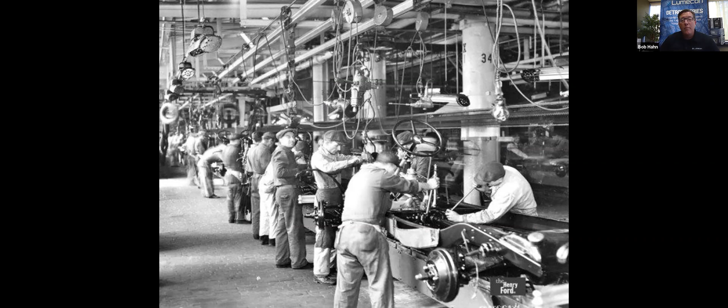100 years ago, Detroit moved the world and provided automotive innovation and defined an industry. Now, more than a century later, Detroit still delivers on that quest: build quality, precision, and do it in America. Not only does Detroit lead the world in automotive innovation, but it also serves as a caretaker to the very people that live in and around the city, providing work and sustainable communities to raise our families in.

Representing the city from which we build it, the Detroit series line offers bold, precise design and execution focused on exact tolerances, clean lines, and elite engineering. These are all cast in the United States and boast a 10-year all parts warranty. Let's face it, we're an engineering team first, then we put on a manufacturing hard hat. The inspiration for Detroit is visible throughout the whole line. The Detroit series sets Lumecon apart from the rest of the outdoor lighting industry.

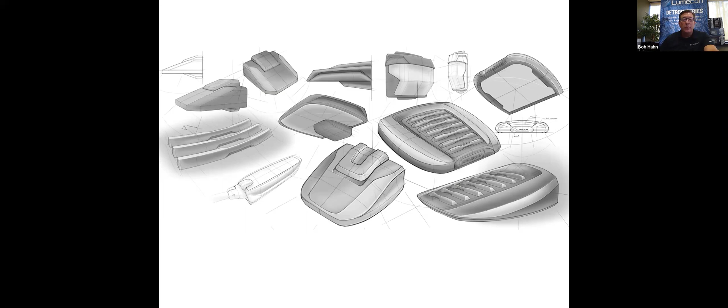We brought our product forth from concept to production line. This slide shows you the conceptual image that we used to shape the Lumecon Detroit series fleet. Then these CAD drawings show the level and amount of detail that we put into the design of the fixture.

So now what? Let's talk about how we built it. From the beginning of the design process, we brought precision and focus to every step of the way. We keep this passion at a fever pitch throughout the build and construction process. The build process begins with bringing together the brightest of suppliers, including tier 1 and tier 2 suppliers to the automotive industry. Our goal: to build the most rugged, precise, and functional LED light on the market.

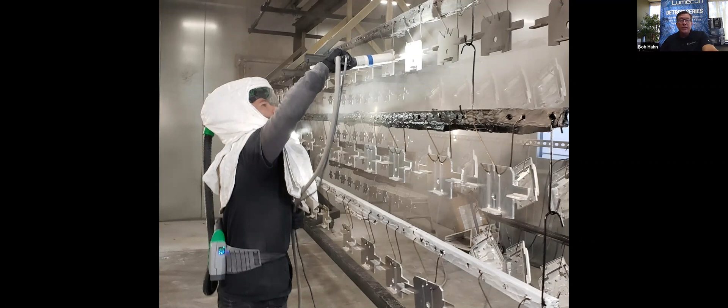The Lumecon Detroit series products are coated using PPG Envirocron Extreme Protection Edge powder coating, an advanced powder coating technology that delivers exceptional corrosion protection. The unique patented polyester paint product provides maximum protection at locations where all other paints begin to fail, at the edges, providing 20 plus microns of paint at all sharp edges, where most other paints are only 2 microns or even less.

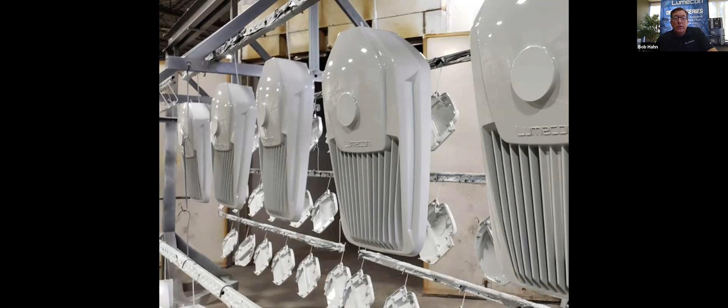The base aluminum material is prepared using an environmentally friendly non-chrome 2-step surface cleaning and passivation process. This results in a more durable conversion layer than traditional chromate conversion coatings and allows maximum adhesion of the powder coating to the aluminum substrate. This unique coating technology provides a finish with unmatched durability and superior gloss retention for years of service in harsh environmental conditions.

Let's talk about Lumecon's enhanced thermal design. Lumecon's ETD system engines are thermally bonded to provide maximum thermal dissipation to the exterior of the fixture to ensure long life. We start off with the LED and its inner diode, then extract the heat out of the rear of the LED, take it through the metal core board directly to the fixture, and then off into the ambient environment.

To protect the light engine panel from moisture and corrosion, the complete face of the LED light engine panel is uniformly coated with a UV stabilized acrylic polymer resin that meets MIL and ASTM dielectric standards and UL and IPC standards for flammability, moisture resistance, and thermal shock. This technology boasts the most thermally efficient light engine design in the LED lighting industry.

If we take a look inside the fixture, we only use tier 1 componentry, meaning our LEDs come from Nichia, Samsung, Osram, and sometimes Cree. Our drivers are mainly Philips or Meanwell. They're programmable drivers that can be field adjusted.

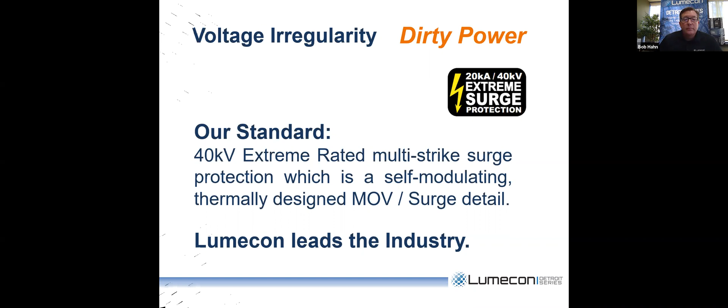So now that we've designed, constructed, and built, now we need to test. With all the care that's taken in design and build, we have the confidence to run the Lumecon Detroit Series product through the most rigorous testing in the industry.

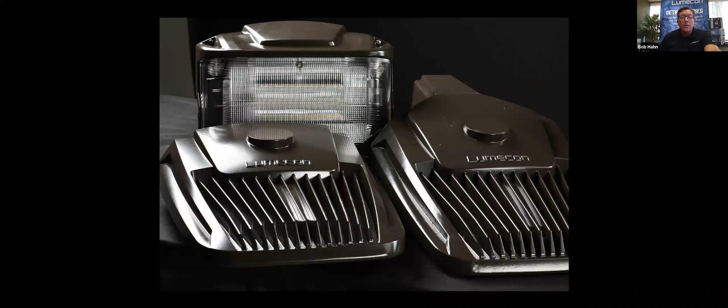First, we start off with 3G vibration testing to make sure it withstands the everyday normal vibration out in the marketplace, including bridges, tunnels, heavy semi-truck traffic. Believe it or not, vibration is another big reason for failures of product in the marketplace.

We salt spray it for 600 hours. We run it through LM79, which includes in situ heat testing at the case of the power supply and the LED array, to make sure it will be able to warranty it for 10 years. Of course, we run it through UL 1598, and then we upload all of this data to DLC, Design Lights Consortium.

Today, we're going to get started talking about the product with the Lumecon wall pack offering, the Detroit Series forward throw and forward throw mini series.

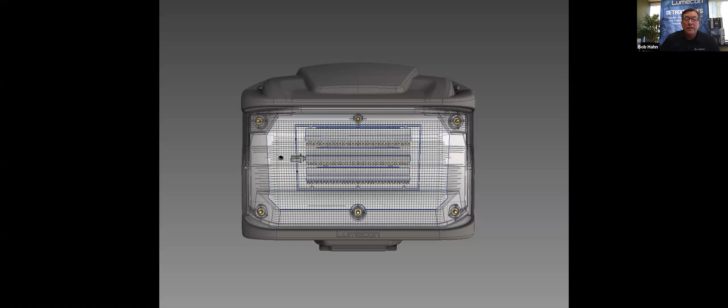Lumecon's forward throw, the larger product, has a large footprint to conceal where other lights have left behind during conversion. From the profile here, you'll see that we've paid close attention to the visual aesthetics of the forward throw housing to enhance its appearance on any building or surface it's mounted to. You'll also see the coin plug knockouts on the sides for surface mount applications.

Now, let's break this out. The lensing here is injection molded in Charlevoix, Michigan.

We've developed precise prismatic lensing that comes with a 20-year warranty against yellowing. Acrylic does not break down unless it reaches 80 degrees Celsius, and with our ETD system keeping the LEDs cool and the rest of the fixture cool, we will not get it anywhere near that temperature. So our ALP Lexalite gives us a 20-year warranty against yellowing.

We've also installed brass inserts to prevent cracking, not only in the installation process, but over years of freeze and thaw cycles out in the actual environment. Here you see our LZAC reflector system to enhance the light pattern, throw, and also achieve DLC rating.

Most excitingly, we have a max compression hot poured gasket that allows infinite compressions, creating a precise seal. The gasket is poured locally here by a tier 2 automotive supplier, Ramp. The gasketing detail we choose ensures that if there is a need to open the fixture, the gasket will hold for your product's life and perform as intended in any climate.

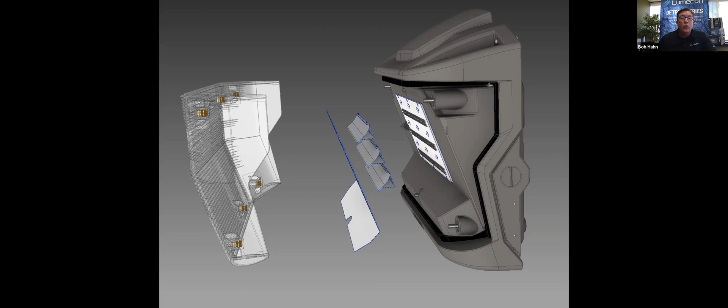The LED board here, featuring Nichia 757 LEDs, are the most efficient LEDs in the industry. The diodes are robotically placed in Troy, Michigan or Clinton, Michigan, directly onto our metal core boards. We offer 80 and 90 CRI options and color temps that range from 2200K up to 5000K. We're going to talk more about that in the future.

This image depicts the back of the housing to illustrate how much space we designed for multiple options. Standard is, again, the 40kV surge suppression and a programmable driver, and then again you see here another max compression hot poured gasket. And then of course you can fit in aux sensing, battery backup, wireless controls, and maybe even some things we haven't thought of yet.

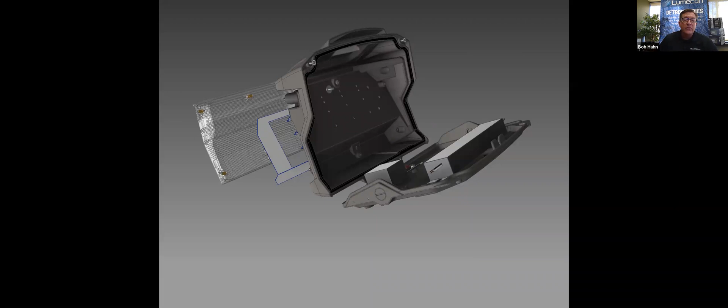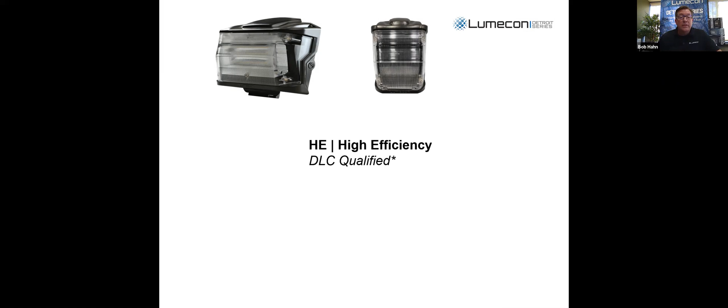Like any car manufacturer, there are always different classes of cars and trucks, and in that likeness, the Lumecon Detroit Series forward throw series offers 3 definitive classifications for your specification lighting project. There's the HE, which is the DLC listed option. There's the HE2, which is the best lumen per dollar option. And the regular, which is the best overall dollar per lumen value.

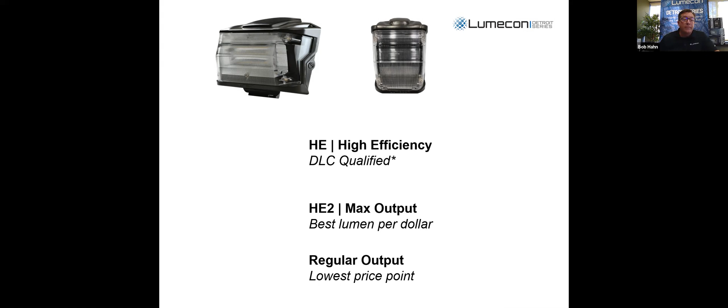So recapping, the body is forged die-cast aluminum, which occurs in Muskegon, Michigan. The housing is a single cast design featuring continuous pour and gasketing for a wet rated assembly concealed in a clean, streamlined wall pack enclosure. The lensing is prismatic, boasting an industry-leading best 20-year non-yellowing warranty that can only be achieved through the injection molding process performed by ALP Lexalite, located in Charlevoix, Michigan. The lensing has been custom designed specifically and exclusively for the Lumecon Detroit Series wall pack fleet.

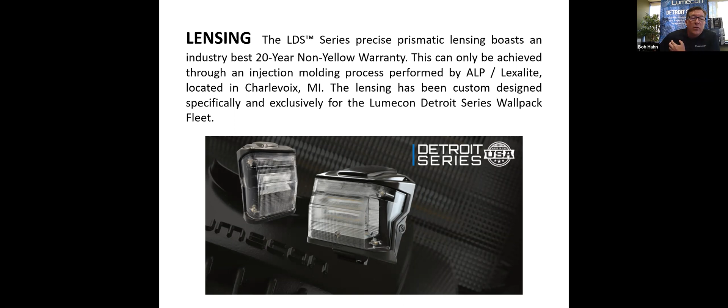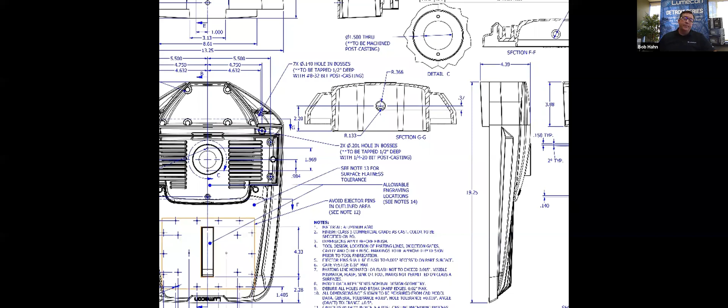We want to introduce our flagship products now: the Lumecon Detroit Series area light and floodlight. The LDS area and floodlight solutions stand ahead of the class in outdoor lighting. Like our wall pack lineup, we've covered every detail during the design phase of this product. So introducing the Lumecon Detroit Series large area light, large floodlight, small area light, small floodlight, and full cutoff wall pack.

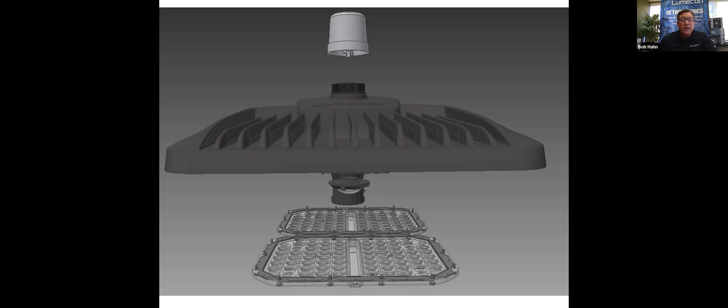The Lumecon area light floodlight was designed as a unibody construction, a one-piece design, to provide optimal thermal path, sharp aesthetics, and unmatched rigidity. This drawing depicts our large area light featuring two light engines with a removable belly pan. As you can see, there's plenty of room for aux sensors, battery backups, programmable drivers, split circuit design, and again, a max compression hot poured gasket for the ultimate seal.

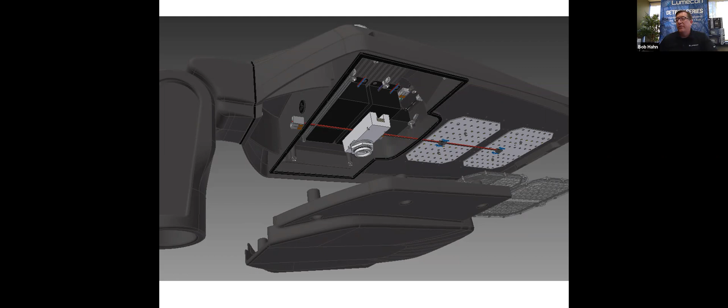Once the belly pan is installed, all the components remain internal, with the exception of the twist lock photocell, aux sensor exterior lens, and wireless controls.

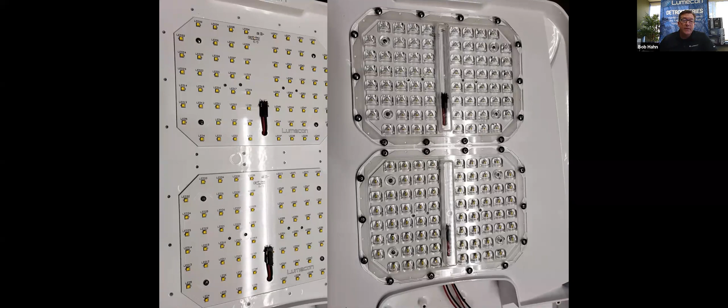On the left here, the Michigan-made metal core board with LEDs placed robotically in Troy or Clinton, Michigan. The optics are placed and sealed on the light engines to create preferred lighting patterns, and that's all done here in Farmington Hills.

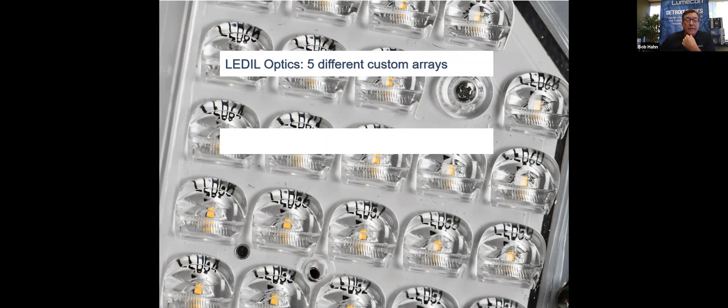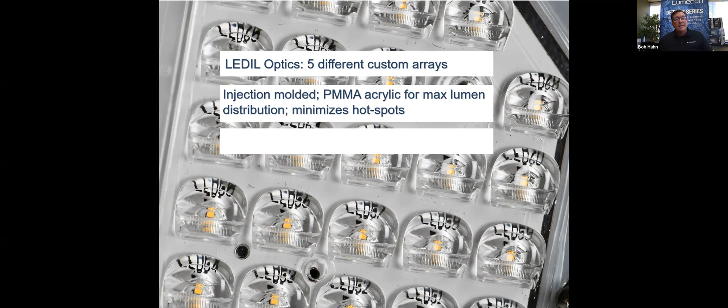Let's talk about the lensing a little bit more. There's 5 custom optical arrays specifically engineered for the Detroit Series by LEDIL in Finland, the world's premier optical engineering and design company. The lenses are injection molded with a premium optical grade PMMA acrylic that provides maximum lumen distribution while minimizing hotspots. They provide 21% better distribution, 29% better uniformity than the leading competitive products at similar wattage levels.

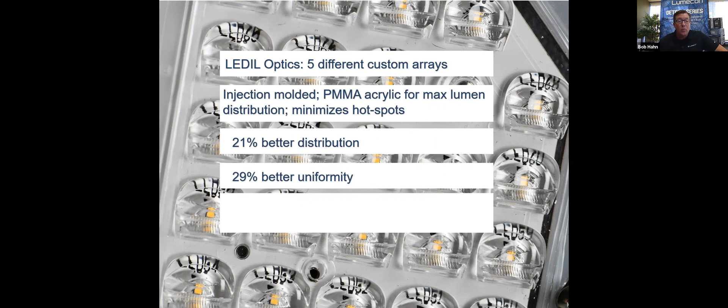The optics are sealed by custom UV stable silicone gaskets that will never harden or lose compression, permanently ensuring no water will penetrate the lens. The entire optical system is thermally engineered to remain below the temperature threshold at which the acrylic will start to yellow, so the arrays will stay optically clear for the lifetime of the product.

Going over the wattages, lumen outputs, and efficacy of the Detroit series large area light: we start with 165 watts creating 26,500 lumens at 160 lumens per watt, and we end up at 330 watts, 47,000 lumens at 143 lumens per watt.

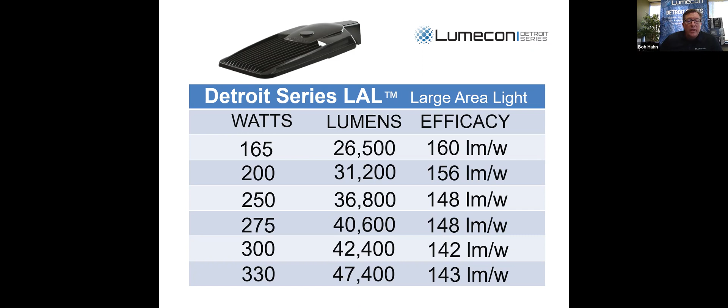Obviously, a replacement for 1,000 watt HPS and/or metal halide all day long.

With the Detroit series small area light, we have a 30 watt version at 4,600 lumens, 154 lumens per watt, all the way up to 160 watts at 23,000 lumens at 143 lumens per watt. In my book, this is a 400 watt replacement all day long, no matter what the current technology.

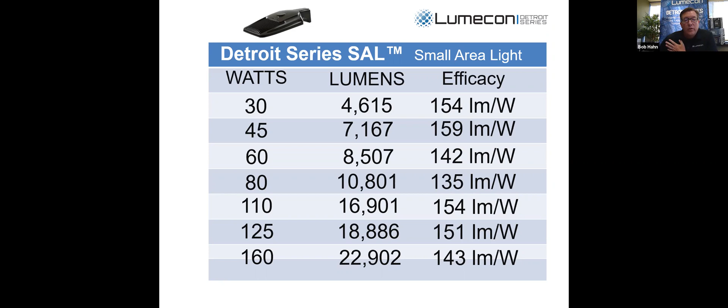So now let's jump to environmental. Many designers are very conscientious of the environment when it comes to lighting. The following describes just some of the options and certifications that Lumecon offers to help complete an environmentally responsible lighting project.

Color matters. At Lumecon, we know that the color of the light is critical. Higher Kelvin temperature LEDs contain large amounts of blue light in its spectrum. Because blue light brightens the night sky more than any other color of light, it's essential to minimize the amount of light emitted. Exposure to that blue light at night has shown to impact human health and endanger wildlife. So the International Dark Sky Association recommends using lighting that has a color temperature of no more than 3,000 Kelvin.

The entire Detroit series lineup has 3,000 Kelvin, 2,700 Kelvin, and 2,200 Kelvin temperature LED arrays available. The Detroit series area lights and full cutoff wall pack are International Dark Sky approved.

Modern society requires outdoor lighting for a variety of needs, including safety and commerce. The International Dark Sky Association and Lumecon advocate the judicious use of required lighting. To minimize the harmful effects of light pollution, lighting should only be used when it's needed, only light the area that needs it, be no brighter than necessary, minimize the blue light emission, and be fully shielded pointing downwards.

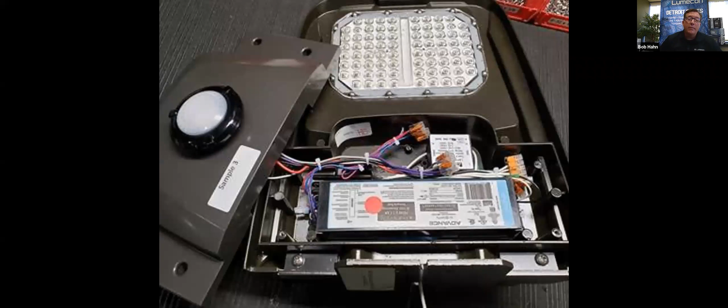So let's talk about field adaptable for a second. Sometimes you order a product in 480 volt and it really turns out to be 120 or 277. Well, not all's lost - you can actually remove the driver. There's plenty of room inside the belly pan, and replace it with the correct driver. If maybe the driver is the wrong wattage for your application, then you can actually reprogram it in the field.

There's also the ability to add aux sensors and photocells, and even change light patterns from a type 2 to a type 3 distribution in case the wrong call was made. We engineered this to be field adaptable, so you're not stuck if the wrong product or wrong options were ordered.

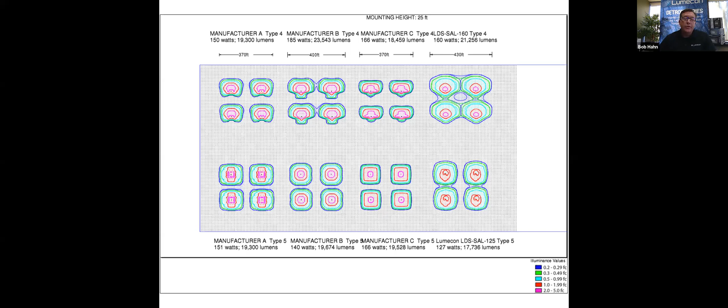Wrapping up, the Detroit series definitely qualifies for the Buy American Act. There are three levels of the Buy American Act, plus a fourth level, level 0 if you will, which is commercial off the shelf — meaning if there's no product made in the United States available, they can use something on the shelf at a local distributor. In many cases, the Detroit series qualifies for the top level, level 3, and all Lumecon products at the very least qualify for level 2. We're also small business certified, so if you're checking those boxes, we definitely cover that.